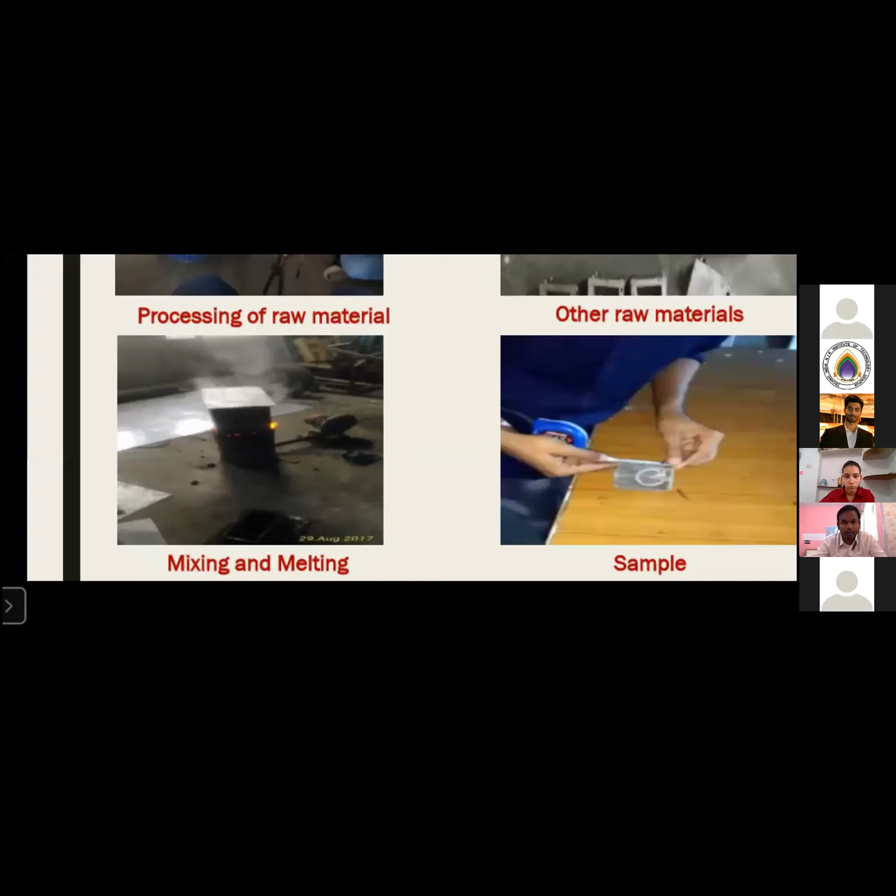We took this sample to our lab and started working on it. The plastic bottles we collected from a scrap dealer, and we collected this slurry from the landfill site. Here in the third picture, you can see the first kind of trial we did with this tin box oil container—we added all the material into the tin container and fired it.

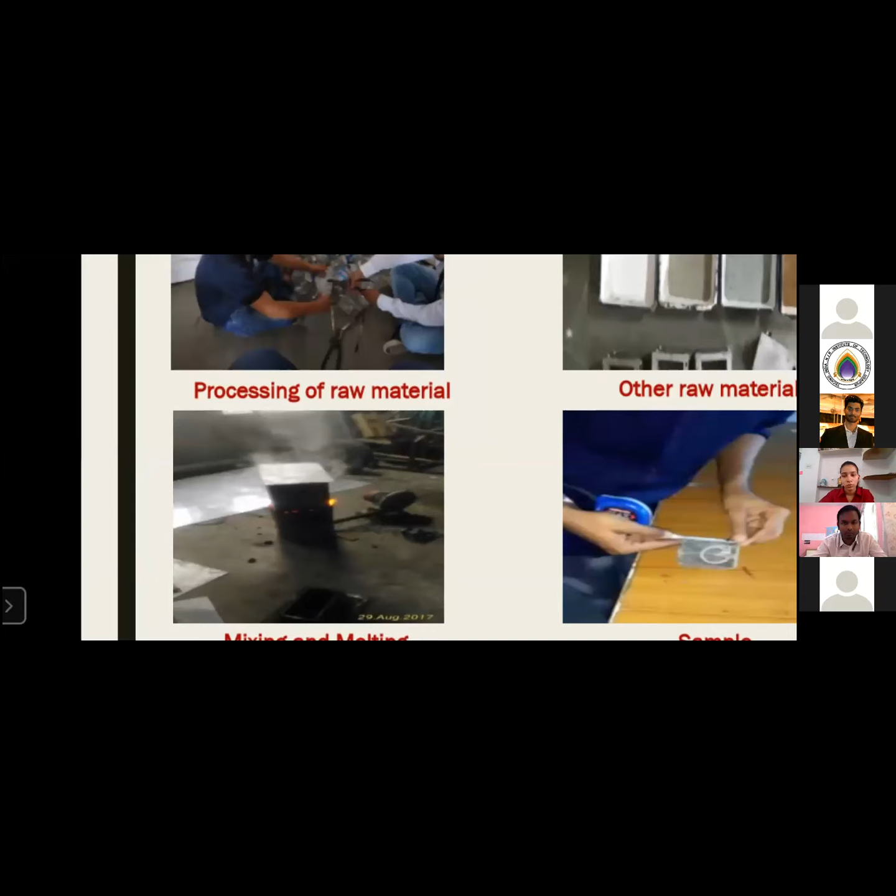We made 35mm, 45mm, 75mm size small samples, and then we tested them. In our first test, we got 6 megapascal, which was equivalent to the second class of brick rating. So then we concluded, okay, this can be made and converted into a commercial product.

So then again, for the brick block, we tried several times with several ratios and several materials, and then we tried in an oven available in our lab. You can see this we did in this oven, and this first prototype of brick we created had a ratio of 1:0.5:1.5.

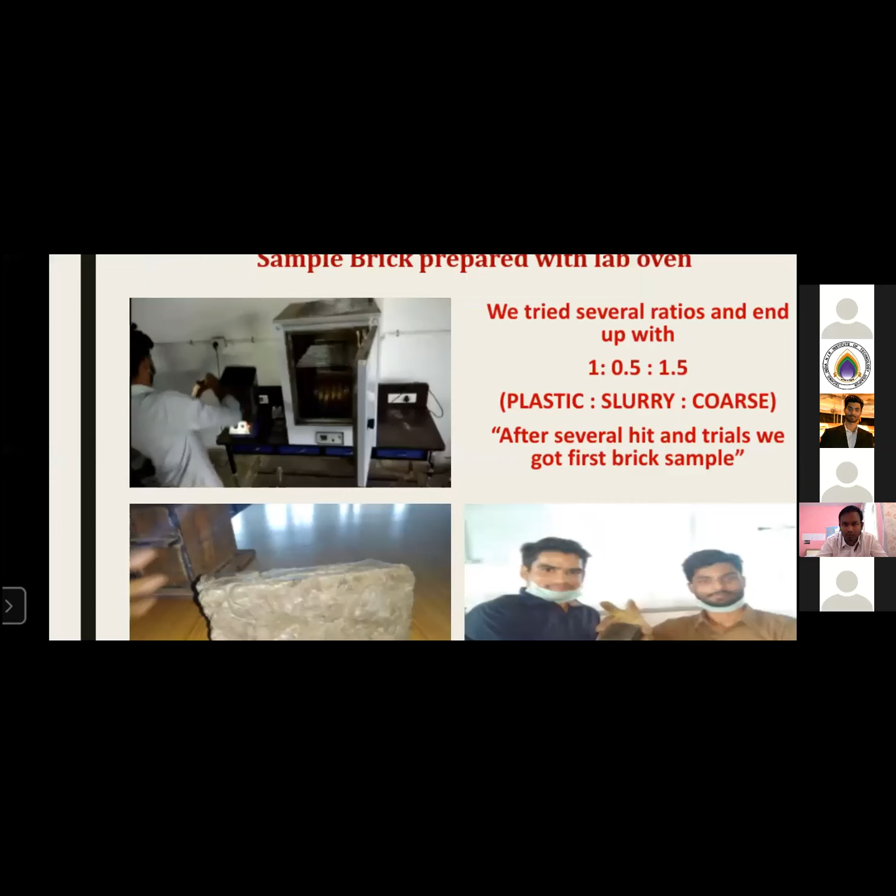Marble and coarse aggregate like sand, and construction waste, was added. This route was used for making a certain number of bricks. Then in the workshop we developed further.

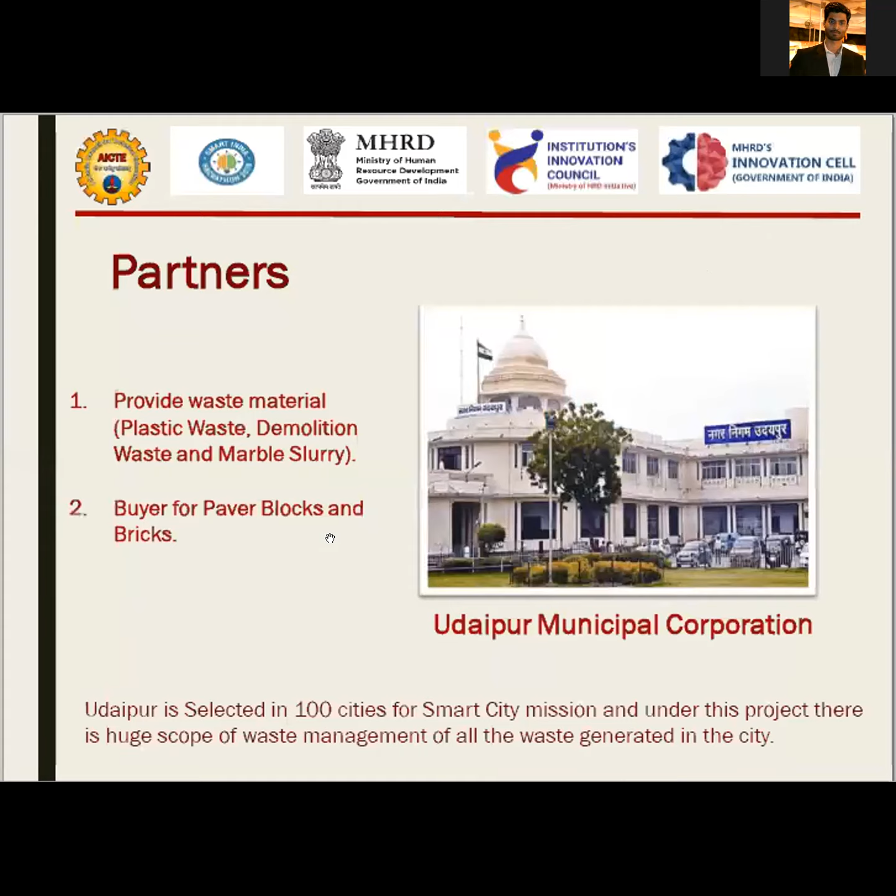So, can I start? Yeah. Okay. So then after we developed this machine, it enabled us to try several different kinds of material and different waste material altogether to make the bricks.

And with this machine, we were able to make a single unit of a brick. So then we tried this brick with granite powder and other powder.

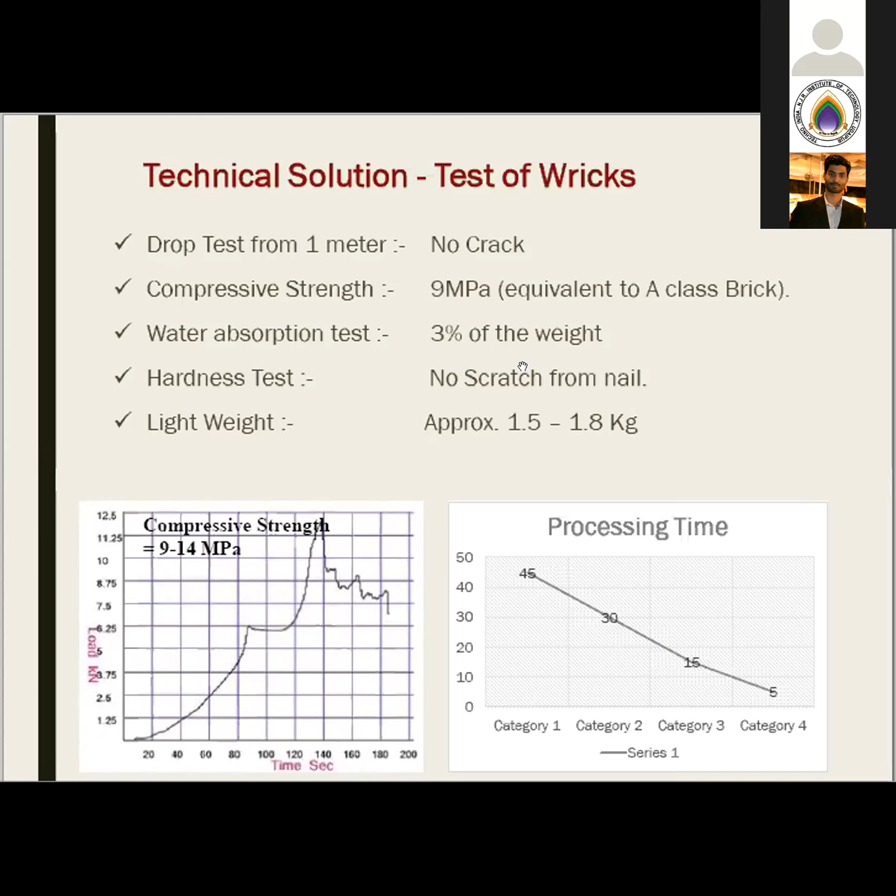Since we have this data right now for multiple samples, we added this one, and it has water absorption of less than 3%, which makes the walls waterproof, and there is no scratch from a nail. It is generally tested for the red brick, and its weight is around 1.5 to 1.8 kg, and its manufacturing cycle time is just 1 day from processing to the final outcome.

This was tested in our lab, and we made some other samples like a cuboid and a cylinder, so it can be reformed into any shape.

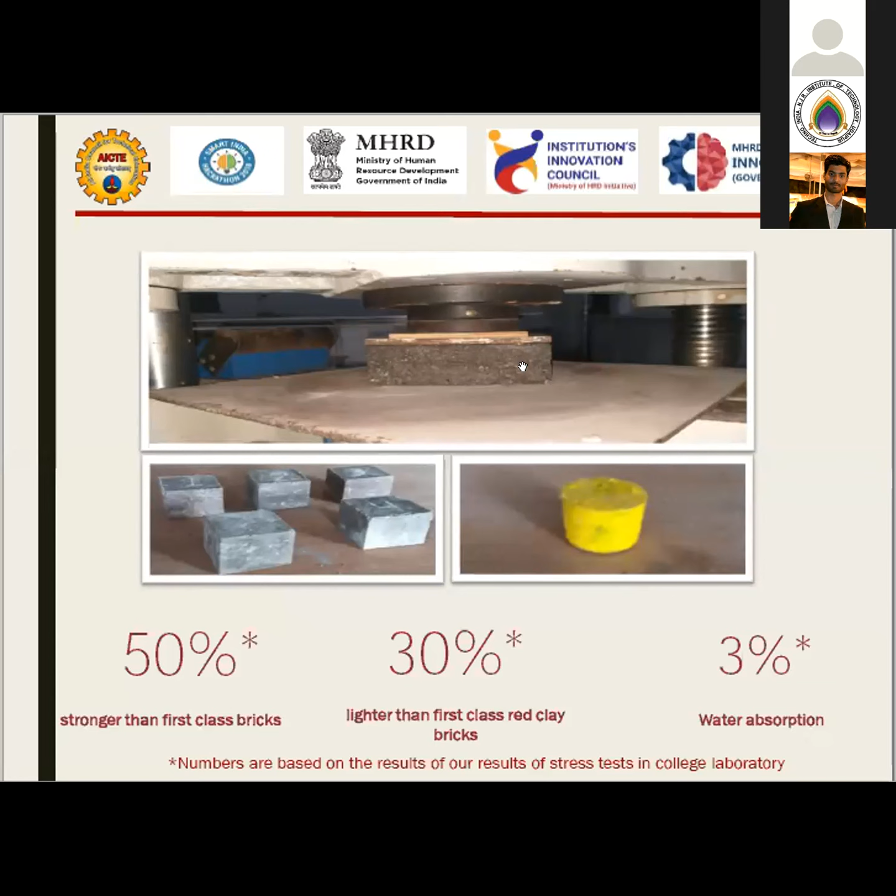With this prototype, we participated in Smart India Hackathon, where we were the runner-up. And after a year, in August 2019, we got a grant of 10 lakh rupees for further implementation of this project.

Meanwhile, we did some market survey and primary research on where to sell, who will buy, and what is the actual demand. We found that around 200 billion units of bricks are manufactured annually in India alone, forming a market of around 1300 billion rupees. We also saw that over the last 5 to 6 years, rates have been continuously increasing by 5% annually, so we see it as a potential market for this product.

We did a comparative analysis of existing technologies versus what we provide. First, processing time: it takes only 1 day after sourcing all material and processing for final implementation. Whereas red clay brick generally takes 5 to 6 months from extracting raw material to the final process, though in-house it takes 16 days from molding, baking, sun drying, and final firing of bricks. In case of fly ash bricks, it also goes up to a week.

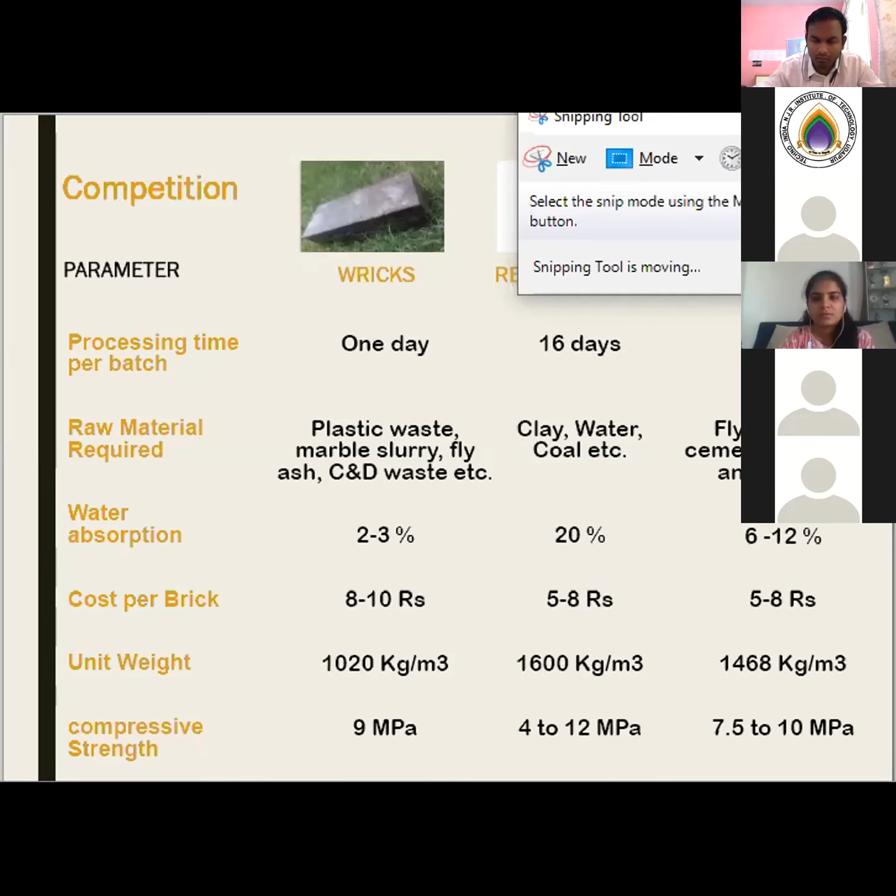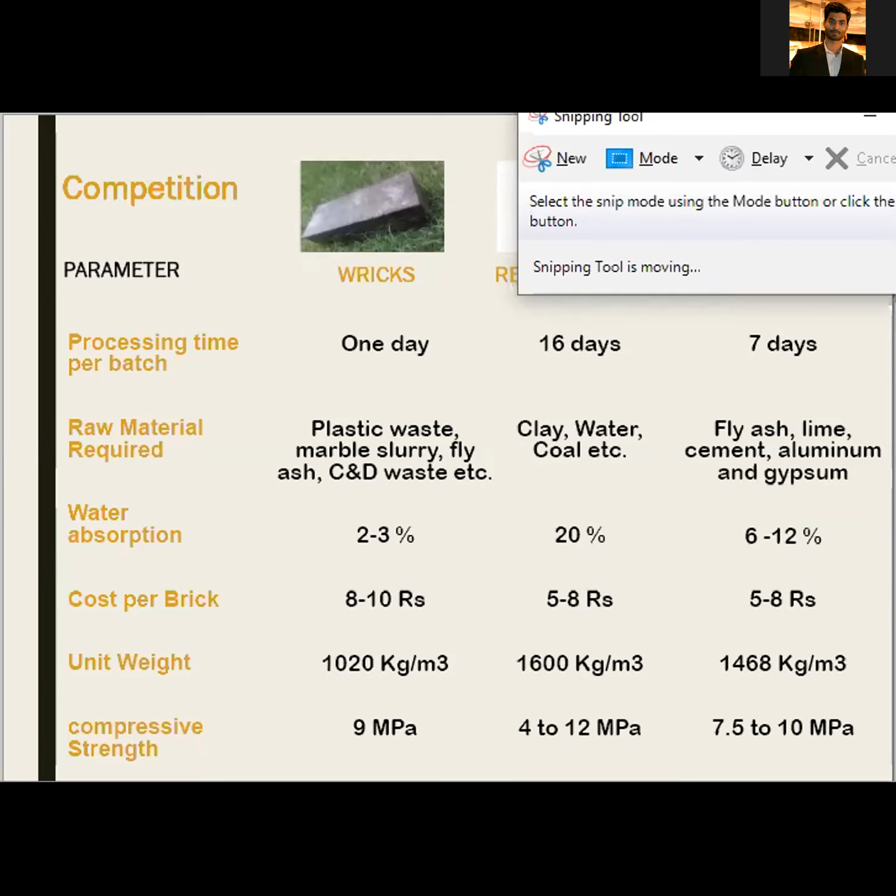On costing, at the prototype level, ours goes up to 8 to 10 rupees, so we will charge comparatively 8 to 10 rupees. Whereas with red clay, it varies by season - in dry season it's around 5 to 6 rupees, and in rainy season it goes up to 8 to 10 rupees. Fly ash bricks are available only in areas where fly ash is available as raw material, and their cost is around 5 to 8 rupees.

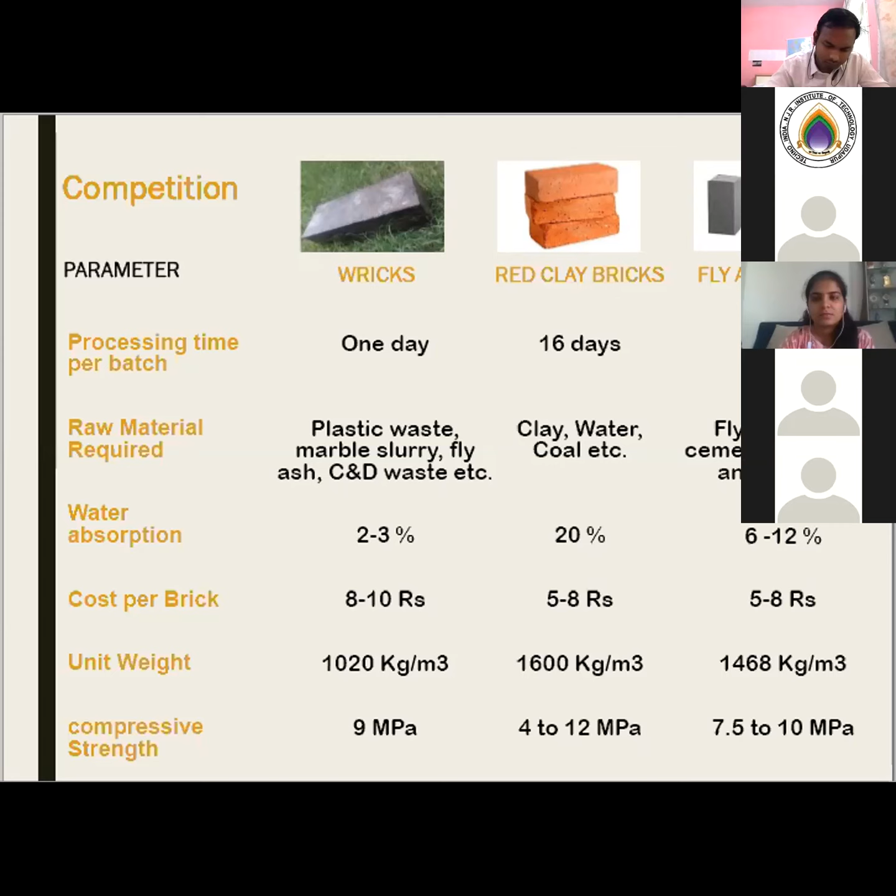If I talk about unit weight, ours has less density because we are using plastic, so it goes up to 1020 kg per meter cube, whereas regular bricks are heavier.

I think, sir, the slide is gone from my screen. Just 1 minute. Sir? Yeah, 1 minute. Okay.

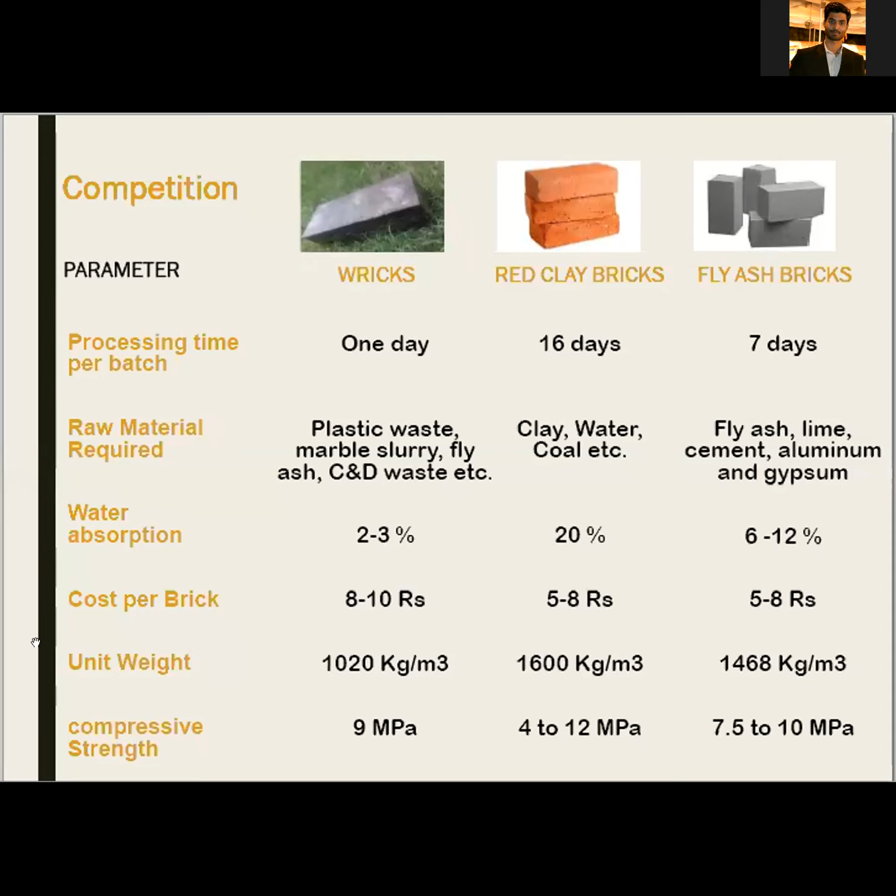In case of compressive strength, the highest we got was 26 megapascal, but generally it is around 9 to 14 megapascal. In case of regular bricks, it's 4 to 12 megapascal, and fly ash bricks 7.5 to 10 megapascal. So it is comparatively equivalent to this brick.

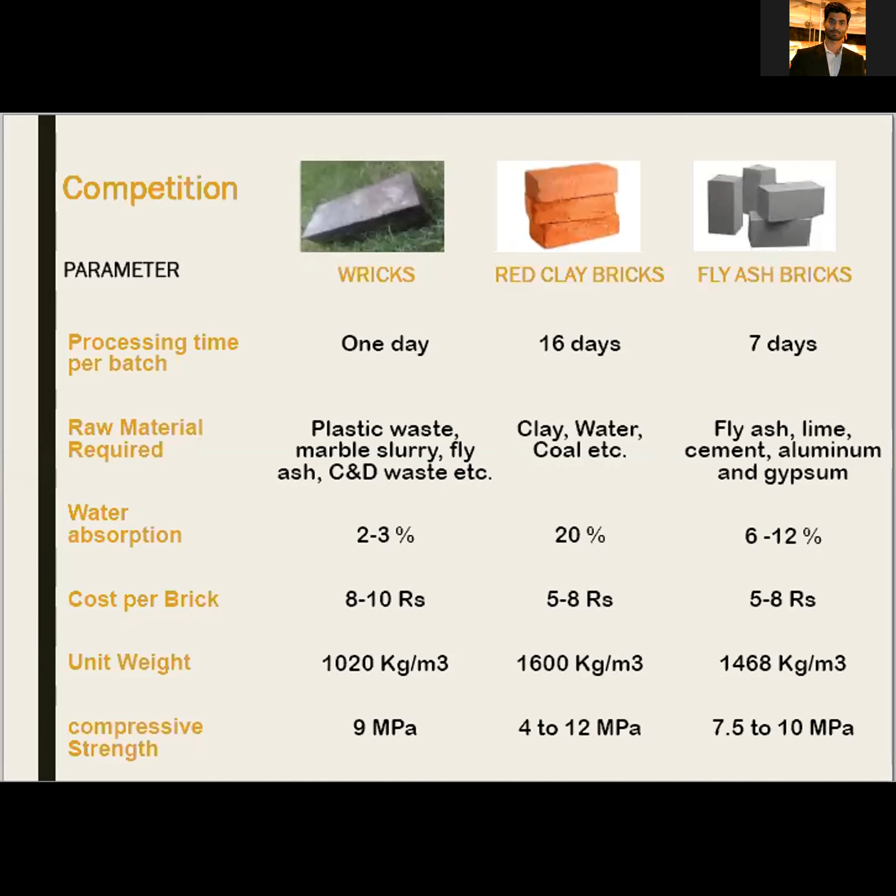We asked some end users what problems they face with fly ash bricks, red bricks, and AAC blocks. They said they have dampness issues, water leakage, and wall damage, with white powder coming out of the wall after 2 to 3 years following the rainy season. These are the problems associated with them, where we are comparatively better than the existing options.

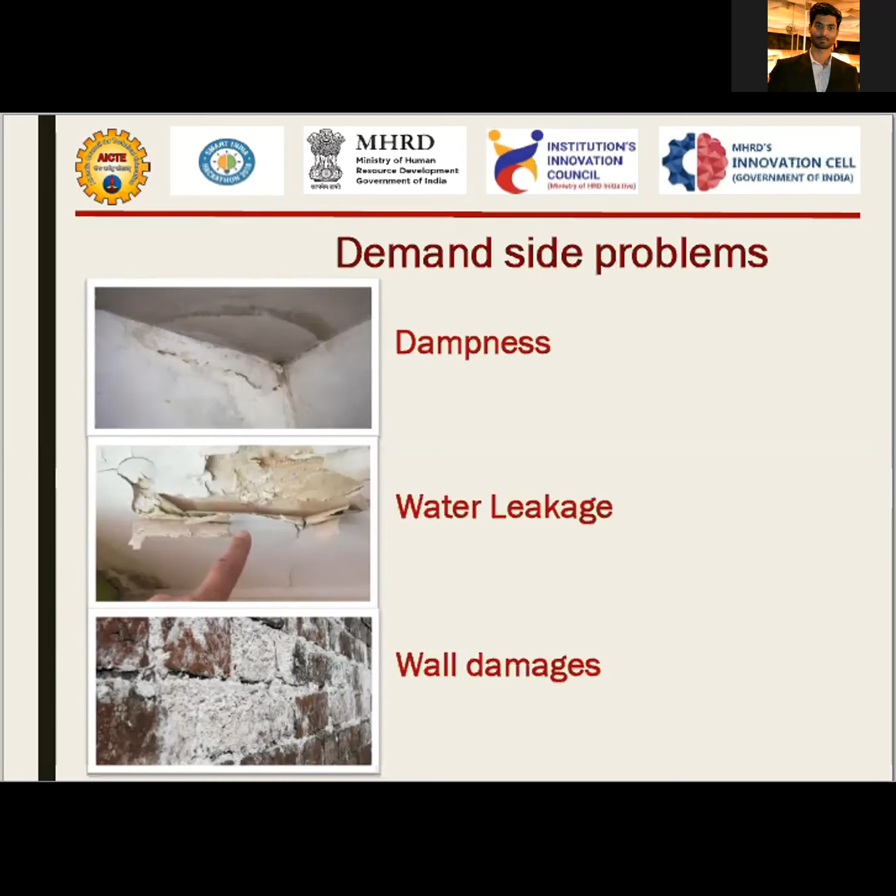After interacting with them, they asked us to deliver some brick samples, and they placed an order of 1,000 bricks. For that purpose, with this grant from AICTE, we are now developing a commercial level prototype.

From this prototype, we will be enabled to make 100 to 200 bricks a day. So we can test on a pilot project and monitor the internal environment, temperature variation, and the effect of weather. We will be able to try those things also.

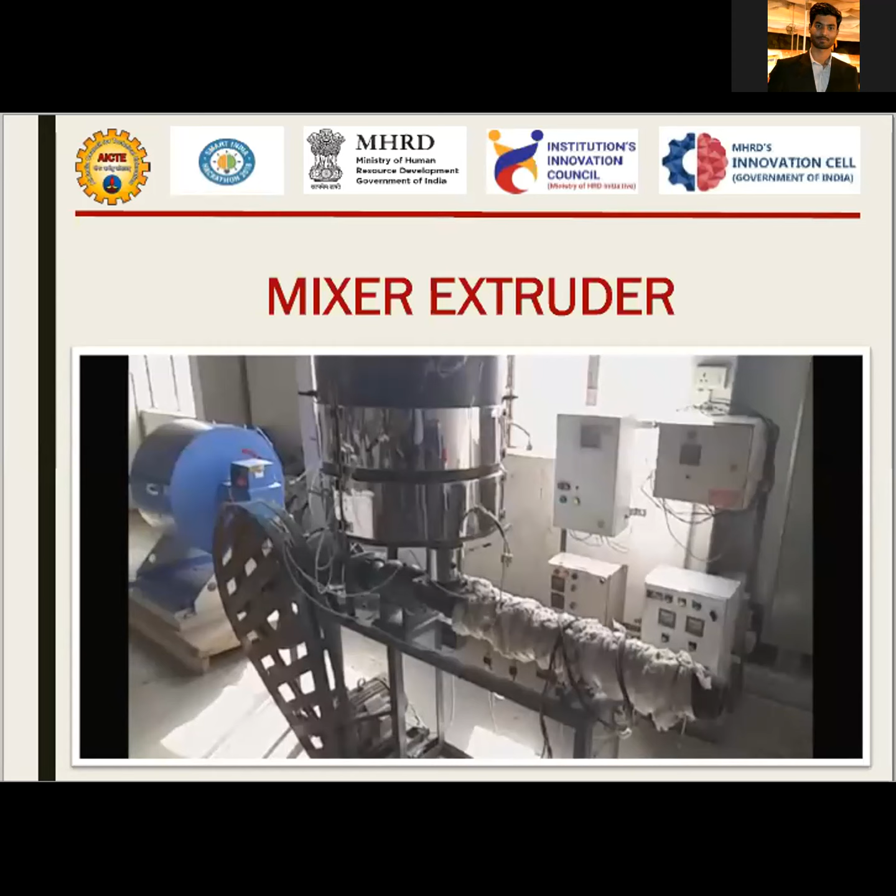Currently we are developing this mixer extruder. It contains three major parts: one part is the screw extruder, the top part is the mixer and heater, and there is an electric panel controlling its speed, temperature, and voltmeter to control all the electrical parameters. Currently we are in machine development. This is how it is going to work.

Is it PDF or PPT? PDF. Can you download that new one? This is also a video to demonstrate how this machine will work.

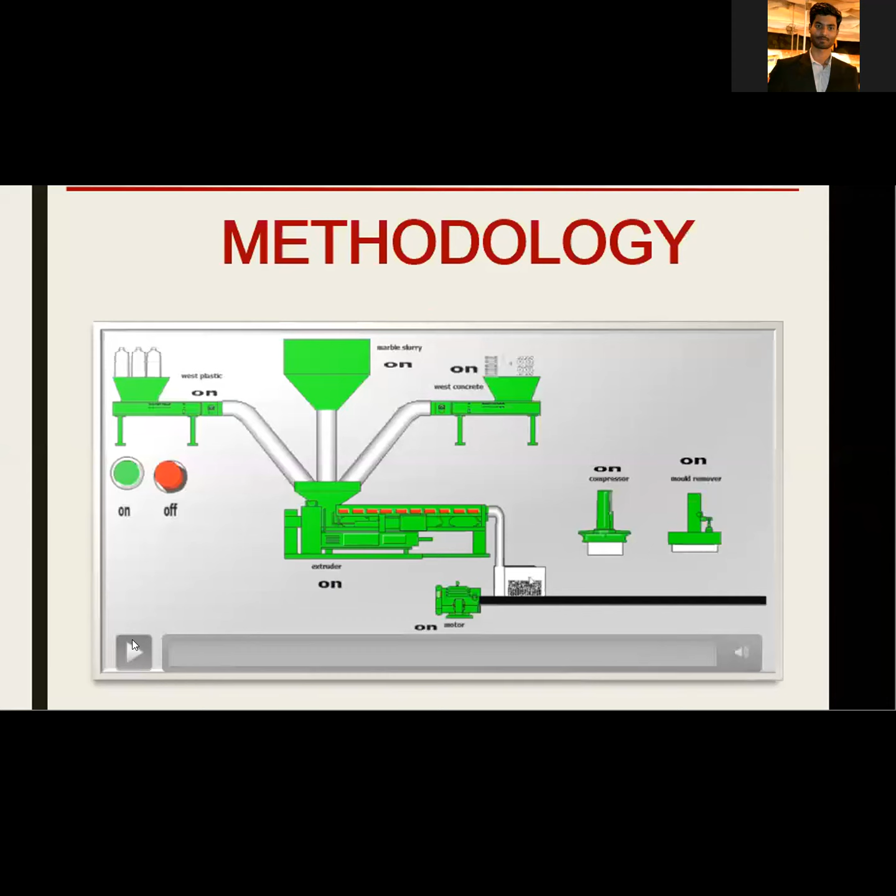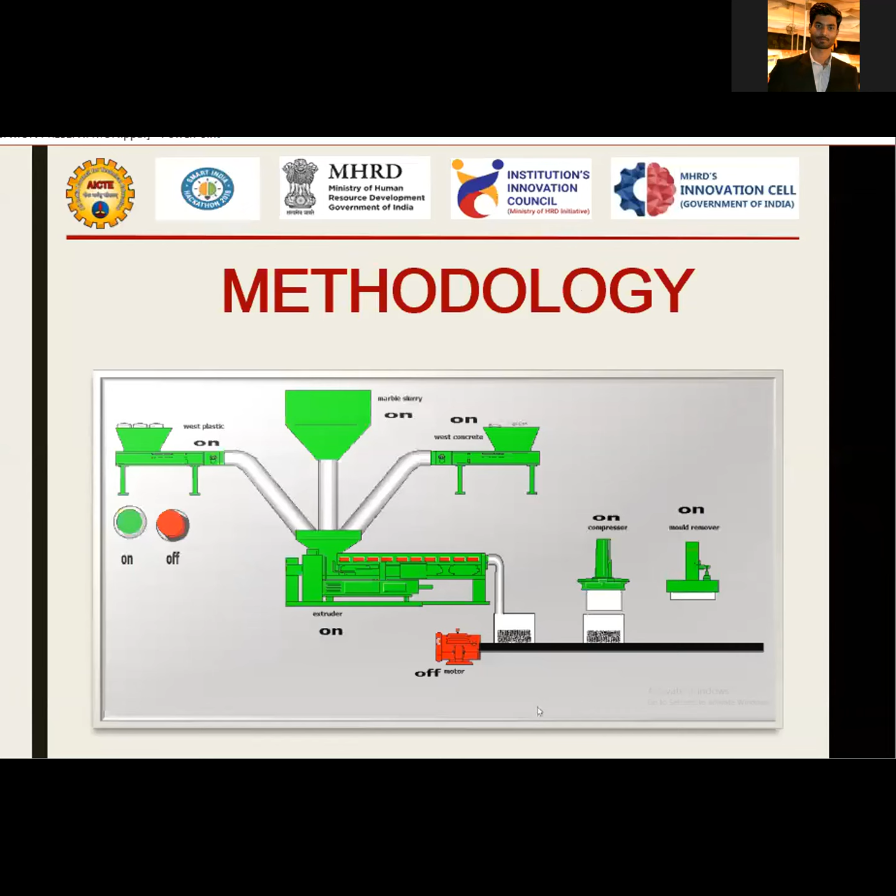Before that, there are three more machines we require. One is for shredding plastic, converting bottles into fine shredded particles or fine powder; one machine for construction waste, to convert it into sand-sized particles of 4.75 mm; and one more machine for the slurry, for sieving and drying. So this is the whole integrated part of the process.

Currently we are developing the middle part, which was shown in the previous slide.

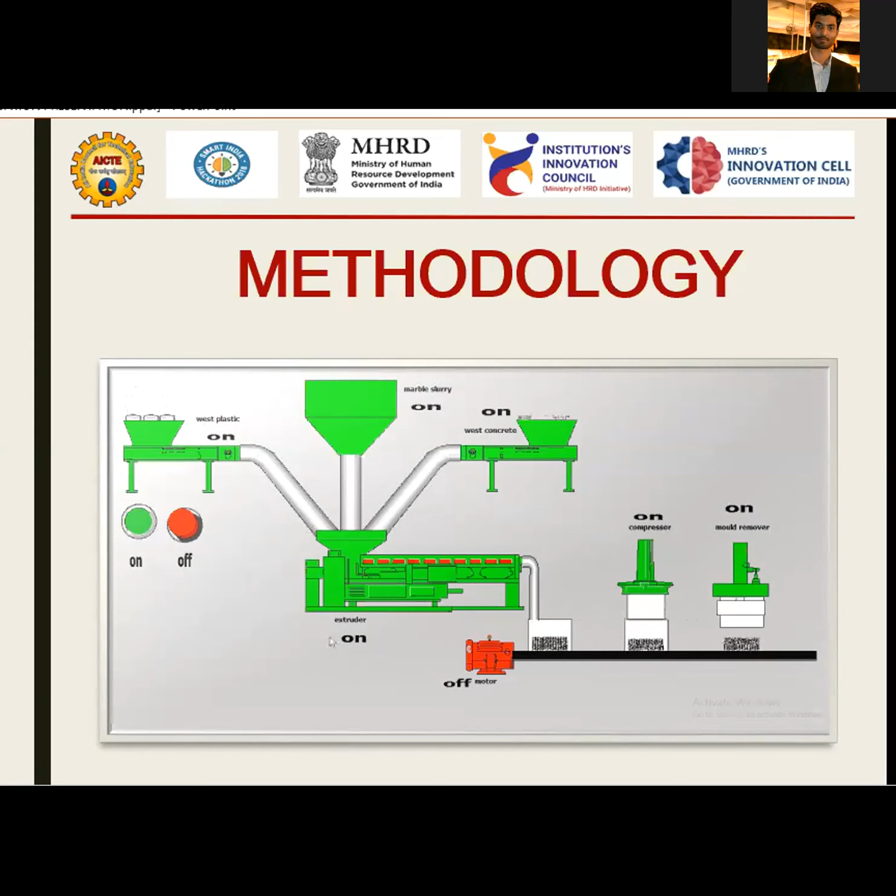Meanwhile, while developing this machine, for the further market and business strategy, we were selected for business incubation at IIM Udaipur. Currently we are taking marketing and business strategy knowledge from them, and they are supporting us to develop this product, this machine, for commercialization.

Hello, yeah, you're audible, okay.

They suggested that we could sell our technology to brick manufacturers too, because they also have lots of problems. Initially we were developing for low cost housing, then we saw it as a waste management problem, and now we explored that red clay brick manufacturers also have problems: government is restricting them from manufacturing in city premises, so they have to shift their plant, some plants are shut down, and they have migrant labor and raw material availability issues. We found that our technology is helpful for them too, and brick manufacturers can be our potential customers.

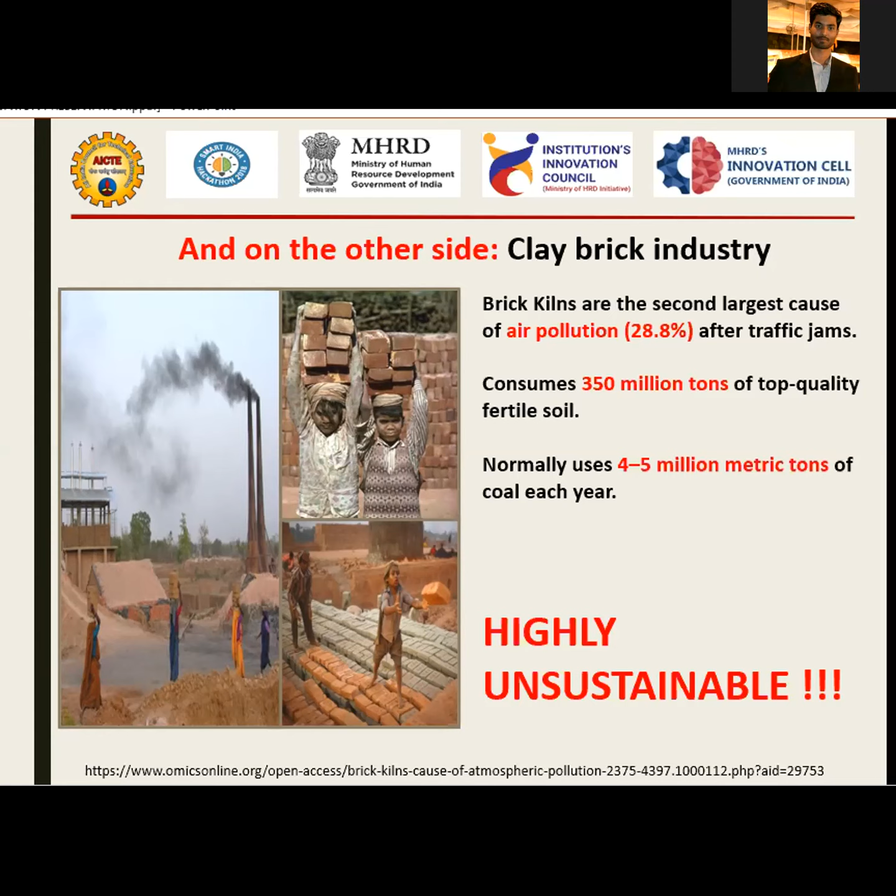We had seen that these three segments can be our potential market: brick manufacturers, builders and contractors who purchase bricks, and government bodies.

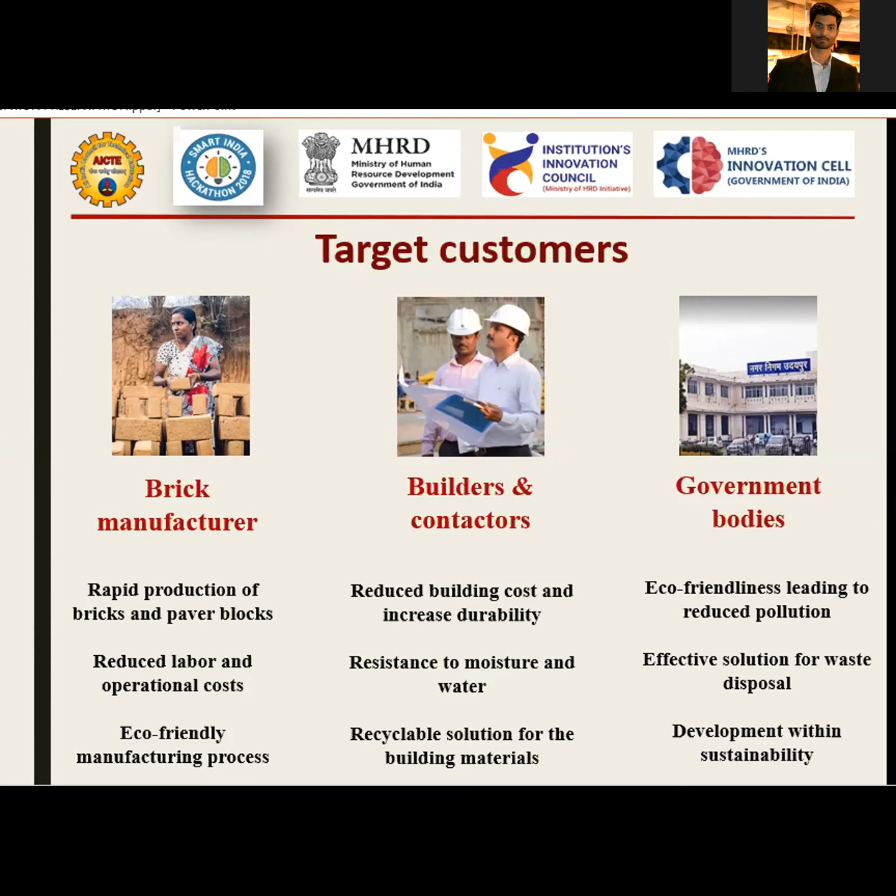We discussed with some government officials in our Udaipur municipality. They are willing to give us raw material like plastic waste, marble waste, and construction waste, and are willing to implement our products in government projects. They committed that they will implement a policy making this brick or product compulsory for all builders and homeowners to use such a green and sustainable product. Currently this is helpful for us to cover these areas.

We had slightly modified this, so our product goes into a hybrid solution. We are providing bricks, and we can also provide the machine and the technology. So this can be our potential market and revenue stream.

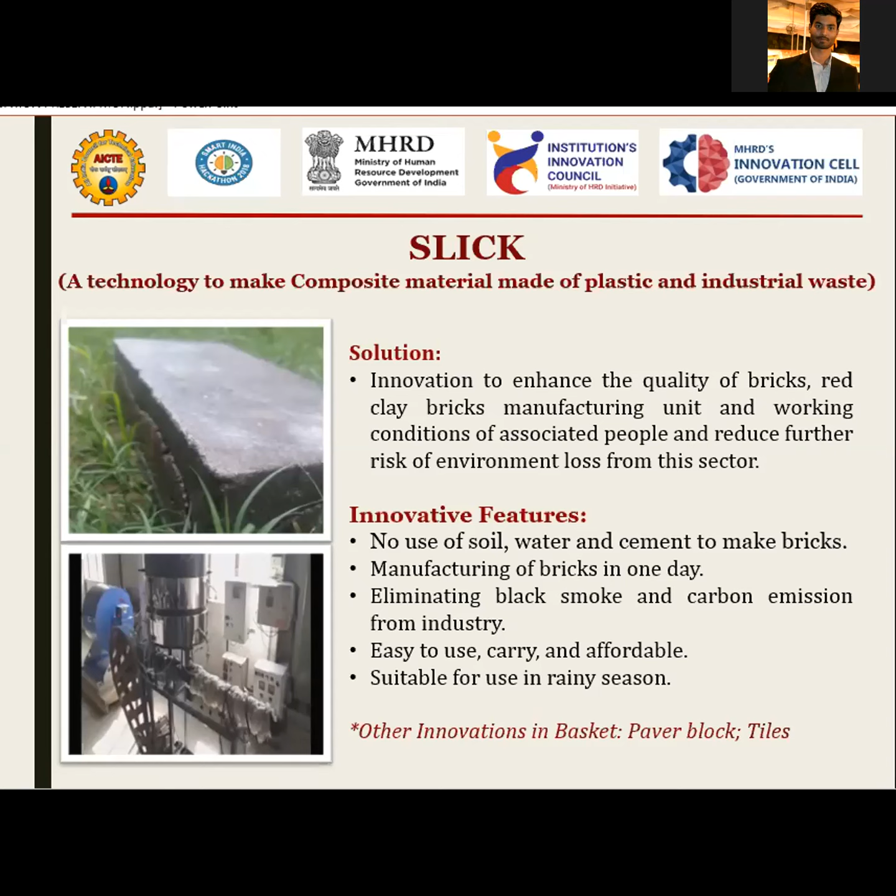Other products also, like paver blocks and artifacts, are in basket products that we can make. For the paver block, we got an order from UIT. This is an additional part of this composite material.

From this problem and solution statement, we prepared a business model where we will collect waste material from industry and local government, then segregate and process it at our plant, and generate revenue from two streams: from brick manufacturers, builders, contractors, individual owners, and from the government also. These are the total potential market for our product, for our solution.

And this is our next one year's plan. Currently, we are in a pilot stage and prototype stage.

So by the first 3 months of next year, we will set up our first unit to make the bricks. Then we will start taking small pilot projects. We will start connecting with people and building a network, building trust, and making people aware about such a green product. And at the end, we will scale with manufacturers and builders also, so we can provide them our technology and they can also use it. This can be our future plan.

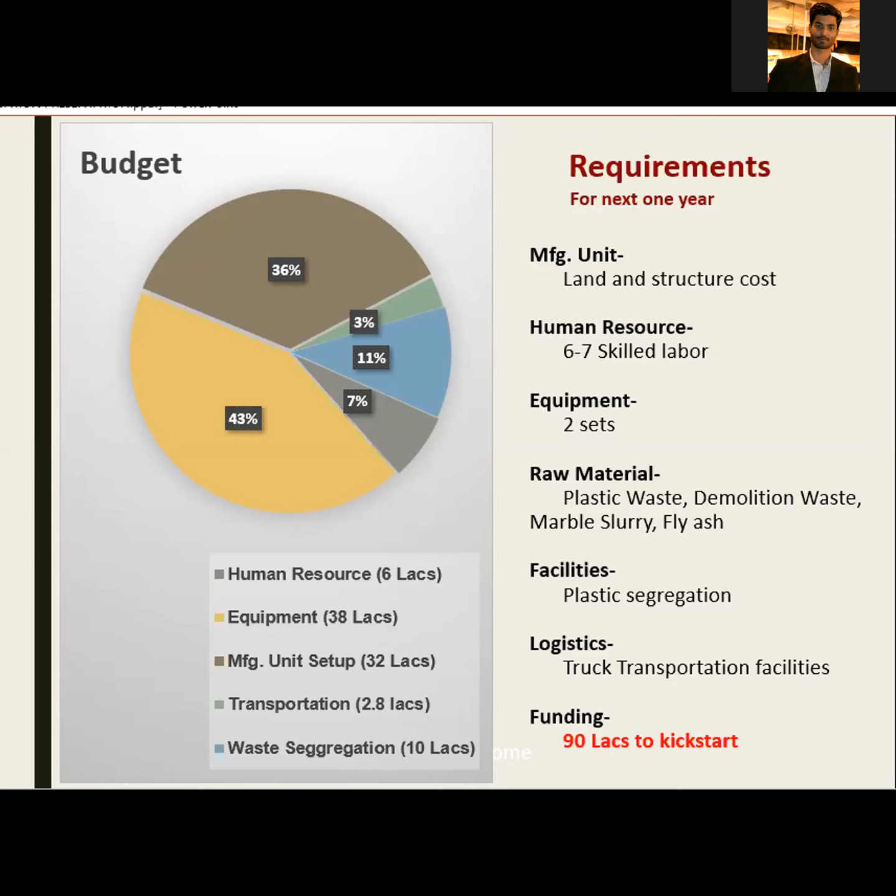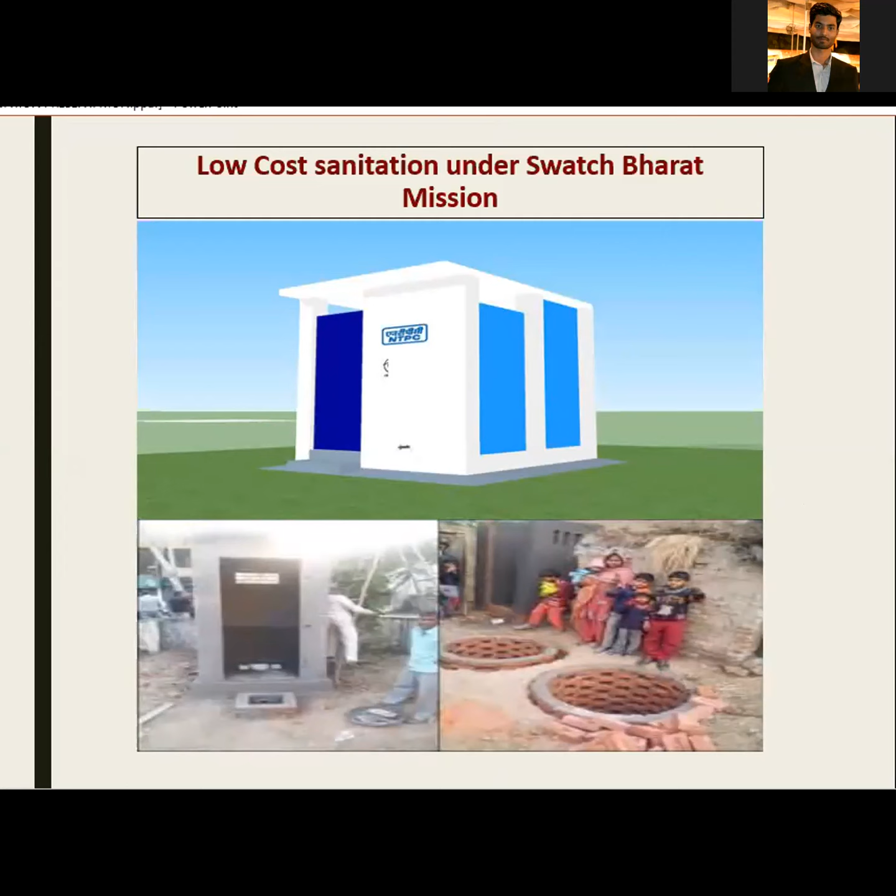These are the opportunities we are seeing: there are some ongoing schemes of low cost sanitation, and PM Awas Yojana. These are opportunities where we can provide our solution in these projects, and it's going to become a huge success if we are able to provide them our solution.

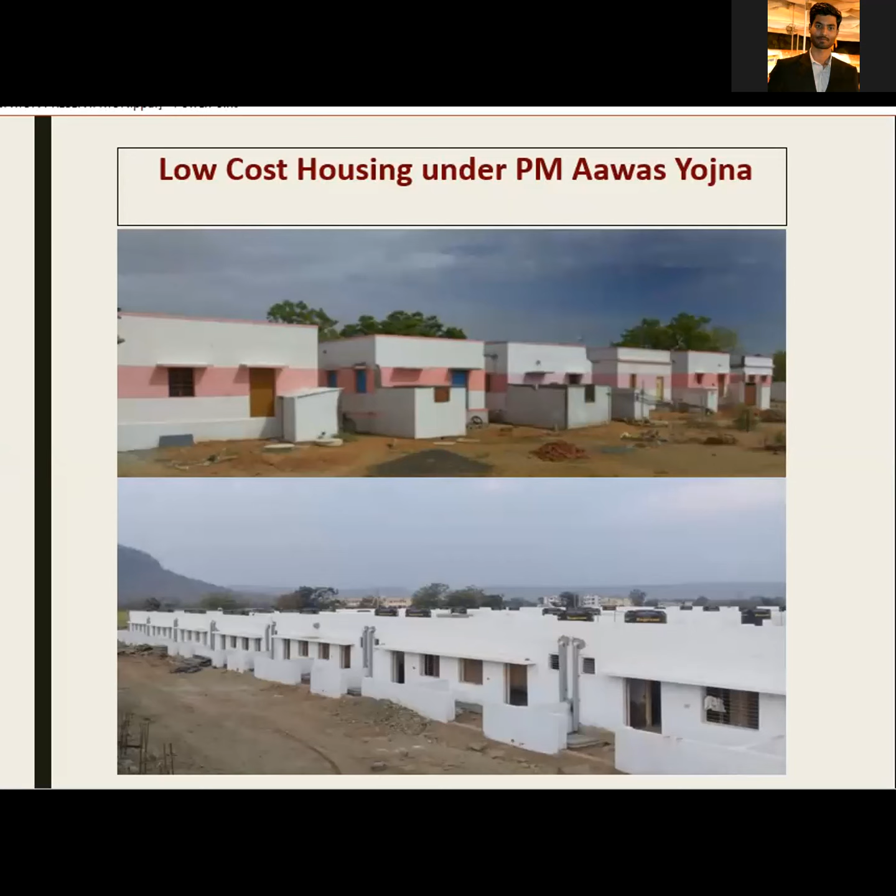Hey Pratyush, you can start. Okay, hello Lokesh. Congratulations on your startup idea.

First of all, I have one question: if you're using the mixture extruder, the new machine, will the cost still be around 8 to 10 rupees per brick? For the final cost, we haven't calculated yet, because we have to minimize it since we will buy in bulk. Then our cost will go down to 5 to 6 rupees. Currently we are purchasing this raw material from retailers, so the cost is higher.

Okay, I understand there is a scale of cost. Then presently, are there any customers willing to pay around 8 to 10 rupees? Yes, government is willing to pay, and one or two builders have approached us wanting to try our product. They ordered 1,000 bricks from us to try, and then they'll judge.